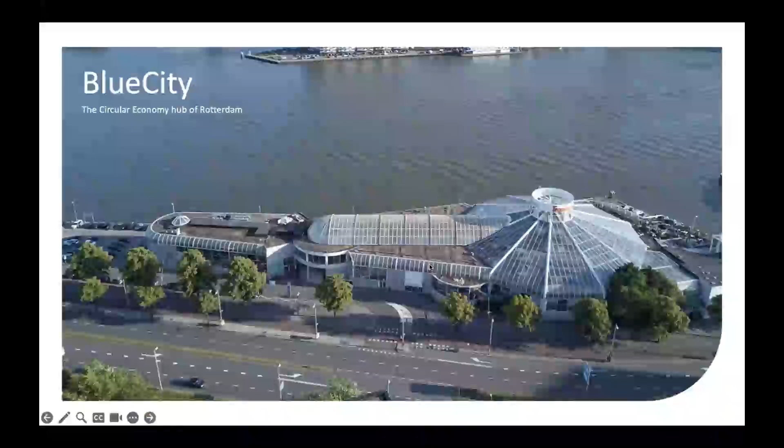Yes. So our office is currently in this building, which used to be a public swimming pool called Tropicana. It's written there, and it's right on the side of the Maas River in Rotterdam, in the center area where there's the port on the other side. It's kind of a busy area regarding the river. This building not only was repurposed, but also it is today a circular economy hub in the country, where lots of different startups and also major companies share this workspace. It keeps changing. It's not something that stays the same; it continues changing according to the different companies that come to rent space for some time.

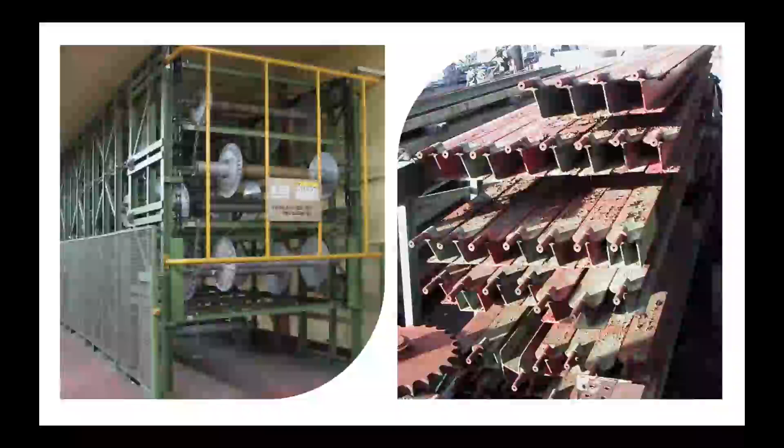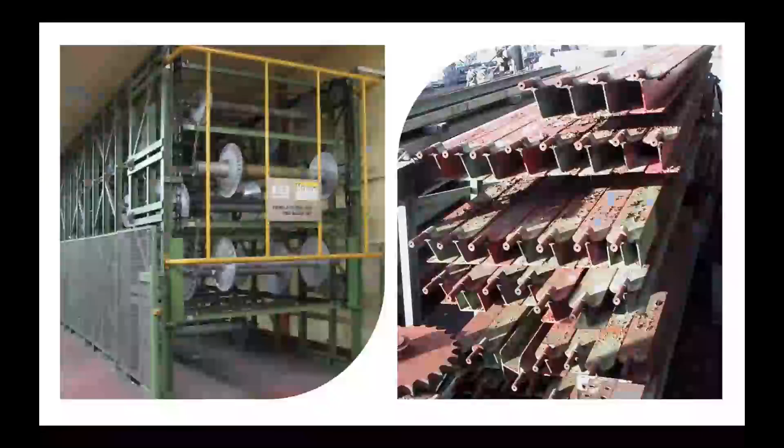These are some of the materials that were harvested - that's the term we use when we identify materials around the location of the project - from this old textile factory that was not being used. These are some of the equipment still left there with no use, and there's a lot of material there, which we used for some parts of the structure of the building.

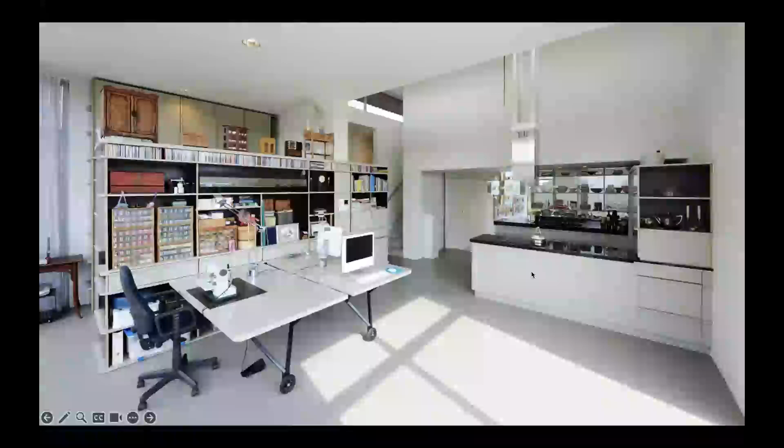Also, all the bookshelves are made from the same material. The facade is made from cable reels - here is more detailed information about the facade. These cable reels are very resistant, produced for industrial use and outdoors. They stay mainly outdoors, and this wood is given for free.

You just call them, and if you can go pick them up, it's absolutely for free. We analyzed the wood - it was in good condition. The engineer on the team also agreed to use the wood. It was treated, and then we started to draft the design for the facade with it.

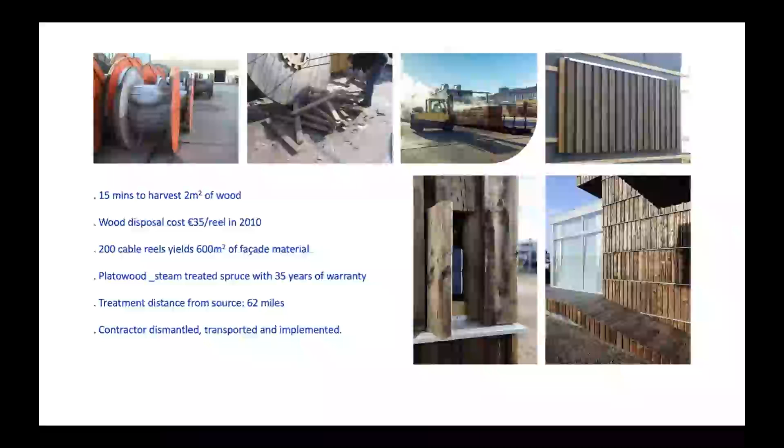As you can see, the way we design is mainly based on previous research of the materials we have in hand - the amount, the shape, the quantity, the quality of these materials. But we also have to take into account research about the costs, how to transport them, refurbish them, treat them, and how that component comes to us and can become useful in this new design.

So it's a kind of inversion of the traditional way we're taught at school - that we design the building first according to a specific program, and then go shopping around for the materials. Actually, the way Superuse works is, in my opinion, a very old way. I think we all humans kind of design like this from the very beginning - we always design with things that we find around.

I think this analysis is really critical. If you follow the steps of what that material needs to be reused, it will then be qualified or disqualified regarding costs, but also environmental impact. If the treatment or transportation weight is too much in this calculation, it might not be the best option for the project.

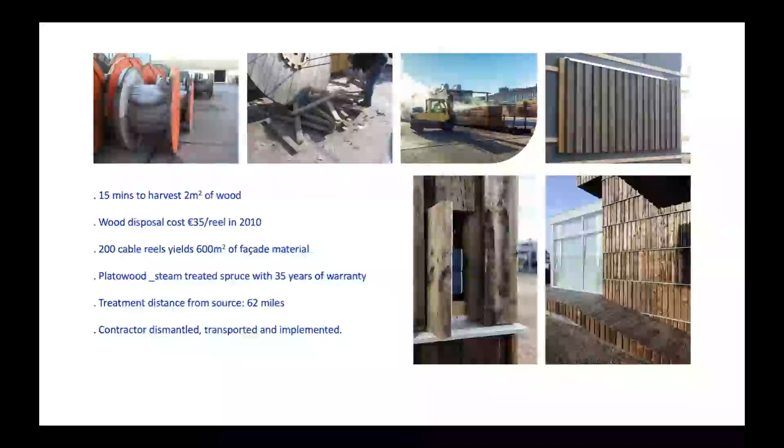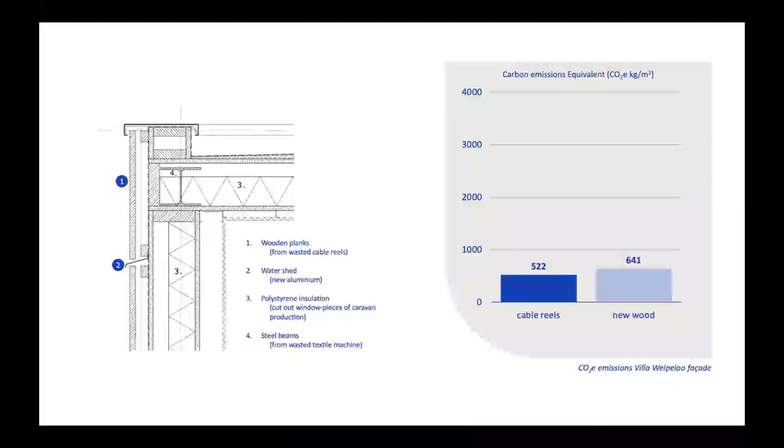So this is, for instance, the detail of the facade. We compared the emissions between using the cable reels, wood, and new wood, and this is a detail of the facade compared with the traditional one.

Even though the conventional approach is proposed here as a benchmark, we designed and built one specific solution, and we calculated it. However, we keep learning from the projects, and we realized we could have even done further approaches to increase the gains in emissions.

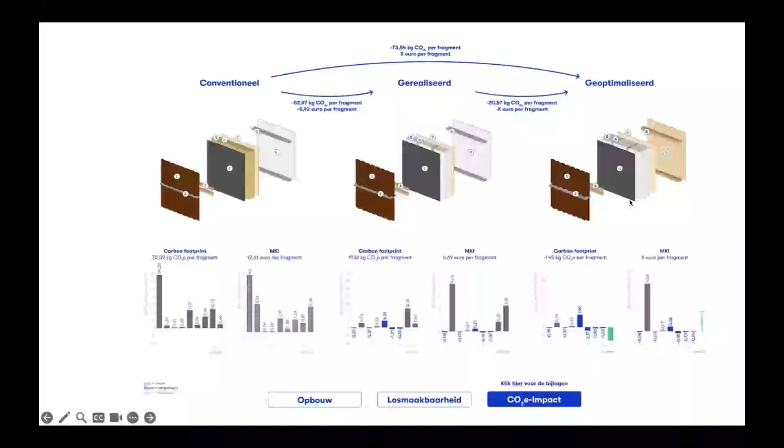It's something we keep learning, understanding further, and applying in future projects. In this case, we could have solved the detail of this facade in different ways to have an even bigger impact. This more recent project is actually about to be completed.

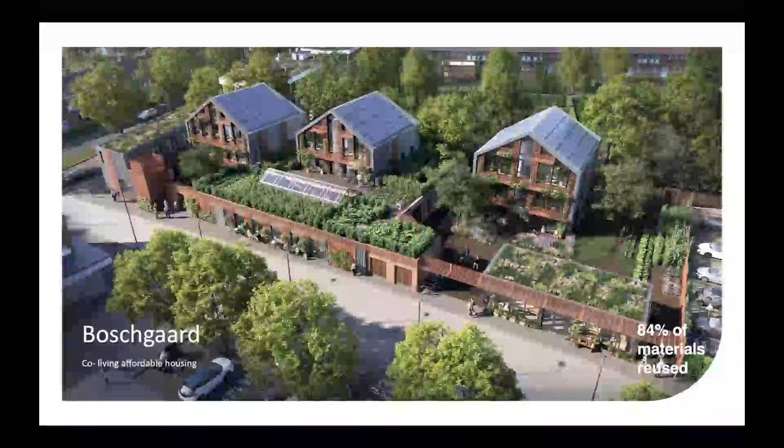It's a shared housing project, also in the Netherlands. I think here we can have a better view. This building is existing - the original building was a community center, a very old one, but the structure, whatever was still in good shape, we kept in the project. Then we developed the housing on top of the existing structure.

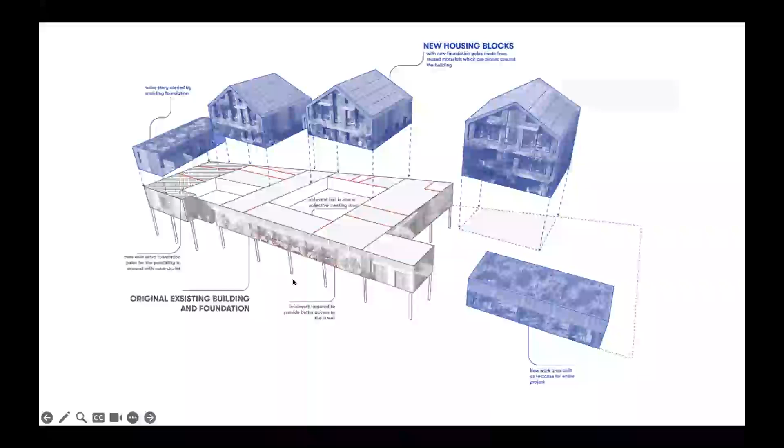Some of these units are shared and some are private, but they are all apartments. If I'm not mistaken, it's 11 different apartments there, maybe 16, and they share common areas.

The process of this project was very interesting because the people who asked us to design it, to collaborate, wanted to be part of the project - even to choose the materials, sometimes to transport the materials themselves. They were really hands-on. It was very much a community approach there.

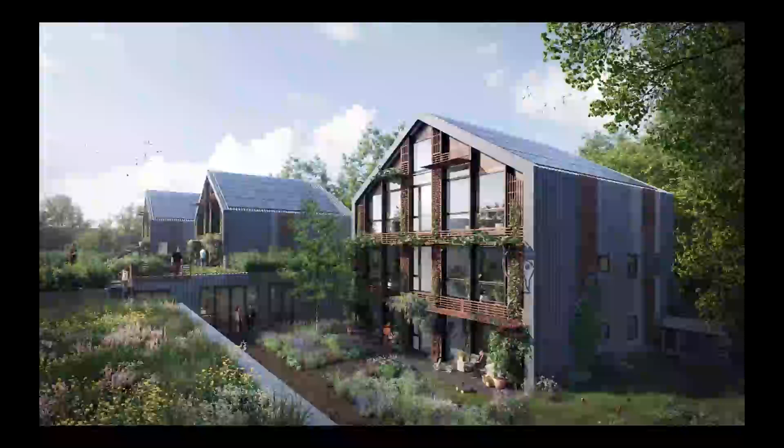For instance, the idea of having areas we could cultivate as edible gardens was also part of the program. Water saving, energy savings - all of this has been part of the program and included.

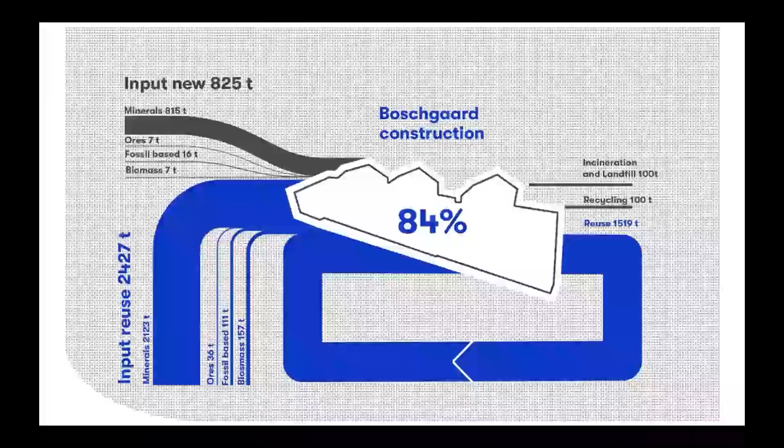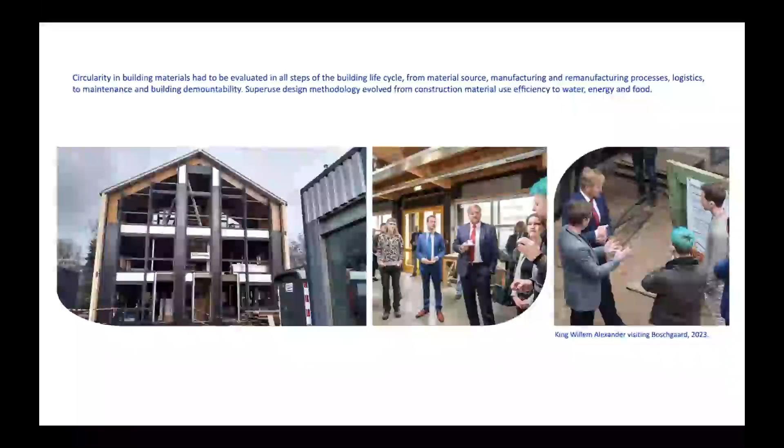This is another project we did in collaboration with a local architect in The Hague. This is a public building - what we call in the US a waste substation, where you bring waste yourself that you cannot put on the curb. We won the bid for this project because it was the proposal with the biggest amount of reused materials.

In this case, we reused 60% of the materials, reused or secondary. The design was done by a different architecture company, and we supported them on material consultancy and material research. So the wood and the metal facade are all reused materials.

We harvest around where we can find the materials that we could apply there. In this case, insulation, the steel parts, and wood were the top ones in the research.

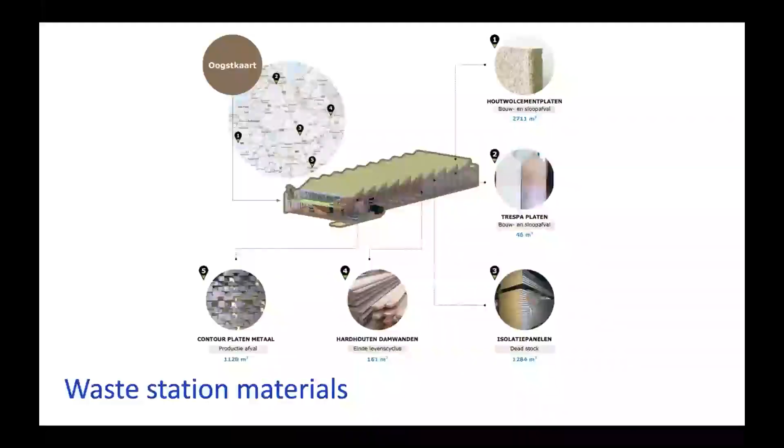And at this point of waste production, at this point of the manufacturing chain, it's pretty critical regarding emissions.

A lot of waste is produced in this manufacturing step, and somehow the industrial mechanism was not being able to absorb these parts very well into the production, or maybe the only way they do now is to melt. So these skeletons, for instance, are available broadly everywhere in the US, in the Netherlands, everywhere, and they're left there for scrap processing.

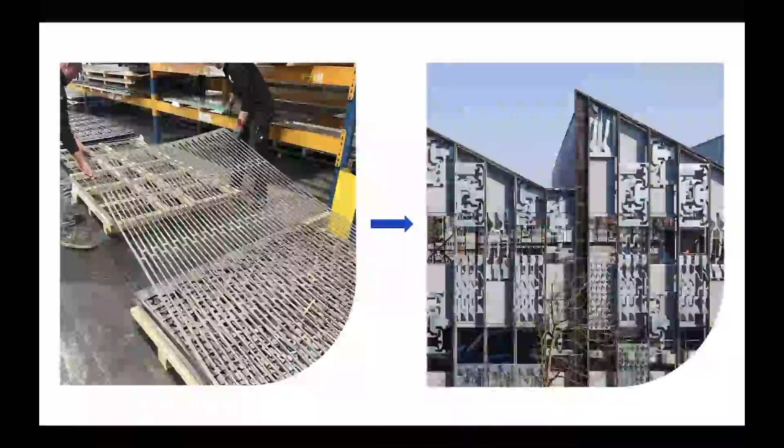So this is a substation, a typical substation - I mean, not typical because not all of them look so good, but as this one. You come with the waste that you cannot put at the curb, and you put it in these specific areas that are denominated the material types. As you can see, there's almost nobody working there - there's probably one person only at the gate, making sure nobody's making a mess. And outside is in the middle of the city, this facility.

So the design of this type of project is also important, that it can be user-friendly, but also that people start to change their vision about waste - that it's the worst possible thing, or that it has to be far away so we don't see it and completely forget about it. So I think integrating facilities like this is also part of educating and helping us get used to understanding what we are producing as waste, what we do with it, and that it doesn't magically disappear.

So this is another view. As you can see, it's all in the middle of the urban area.

Yeah, so this project is a very recent project too. The pictures I have here are really recent, to the point that the plants didn't have time to grow yet. So this project is commissioned by the municipality of Rotterdam.

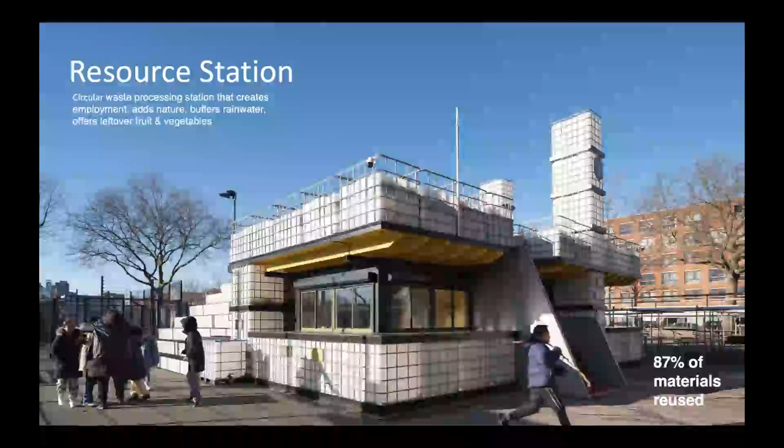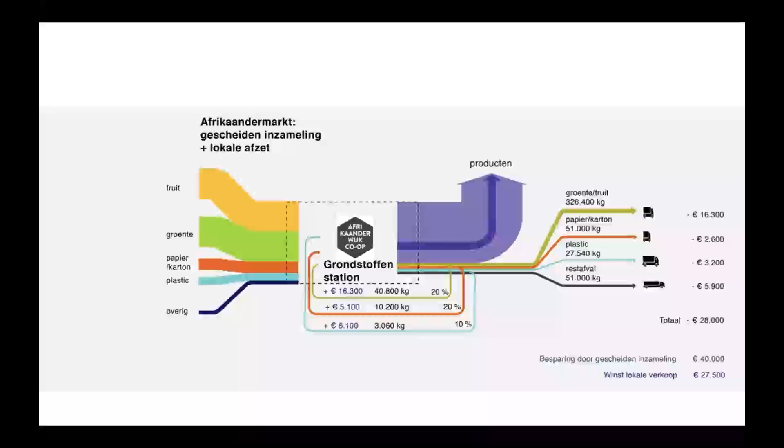So this is the research, the data that we produced after we analyzed what comes out every time the market is set there - what materials are produced, where they go after the market takes place, and how much money it takes to get rid of these materials as well.

So we started to understand that, okay, can we make something about it? Based on existing local businesses and what is possible to do with these materials, we started to connect these dots, and this station was created so that this local small business could use the material that was remaining after the market takes place.

So just an example here - we see that this mushroom production, for instance, consumes a lot of, for instance, coffee beans. And there has been a wave of startups in the Netherlands producing fresh mushroom production for the end consumer.

That they are cultivated into bio-based leftover materials, and the same thing goes for brewery waste or vegan bitterballen - I don't know if you guys know, but this is a croquette, a food in the Netherlands, very popular. So we understood that mapping this local business, it could appropriate this bio waste, it would be an interesting use for this material, and therefore they would be collected in one point.

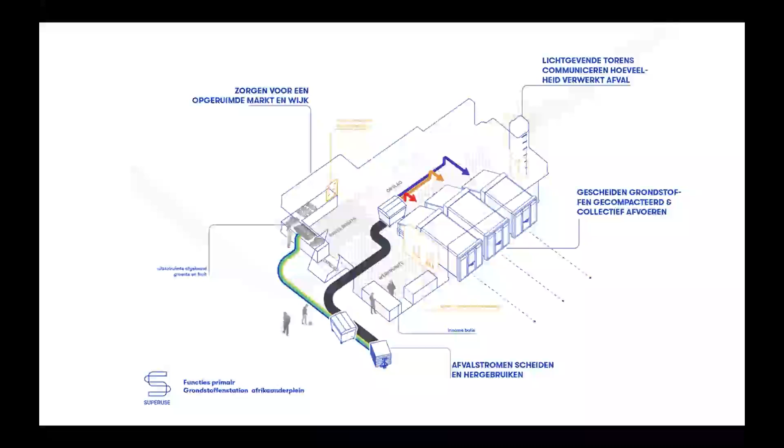That was then the building we created, which is more a pavilion. So this is a diagram on how this pavilion would work, how the material comes in, and this, you see the boxes that are left over, everything is collected and sorted.

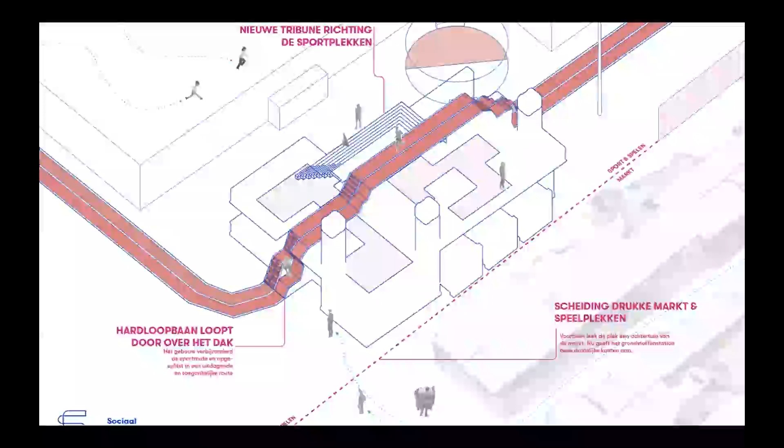And since there is also here the elementary school, we included a track. So the kids use this space. It's kind of, as I said, where the market takes place, but it's also a public square/space for the school that the kids could use to run in, going up and down as an obstacle. So that's how this station was designed, a multi-purpose pavilion.

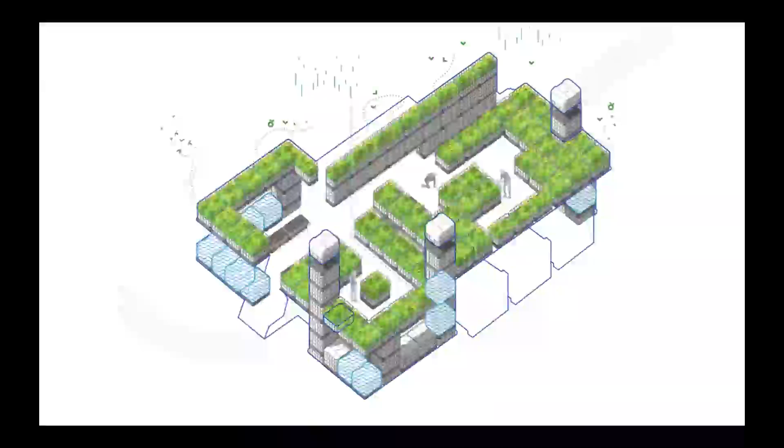And the roof, there would be a green roof created also with the same containers, and the water would be treated by some of this green garden, and used again to water this green garden. So this is the very beginning, and it was the winter last year, so the plants have been just put in these containers, and that was the beginning of the resource station.

So here then we show again for every project which materials came from where. So the idea again of understanding that local materials is important regarding embodied carbon. And we calculate for every project how much of these materials are included in the project, how many of them we can reuse, and how far they traveled to be there.

And of course, when we calculate also the impact of reusing these materials, you really cannot forget that cleaning and remanufacture is also part of the calculation. If you want to make something very complicated out of that component, it might not be the best approach. So this has to be, the remanufacturing part of it has to be taken into account.

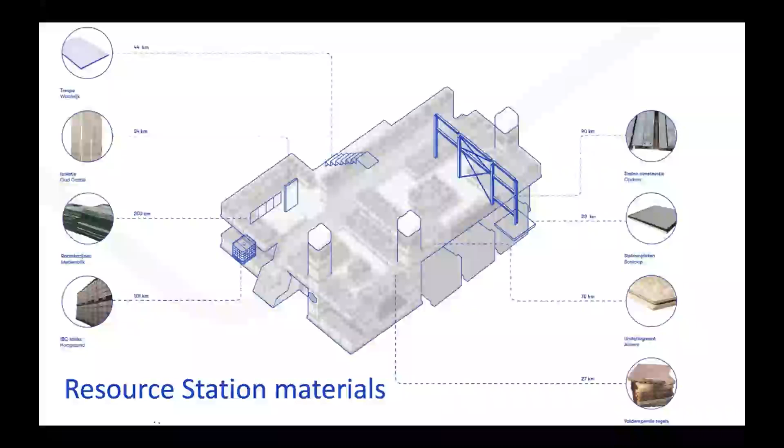So this is part of the structure, the containers, all reused. The partitions, office partitions that were also used here.

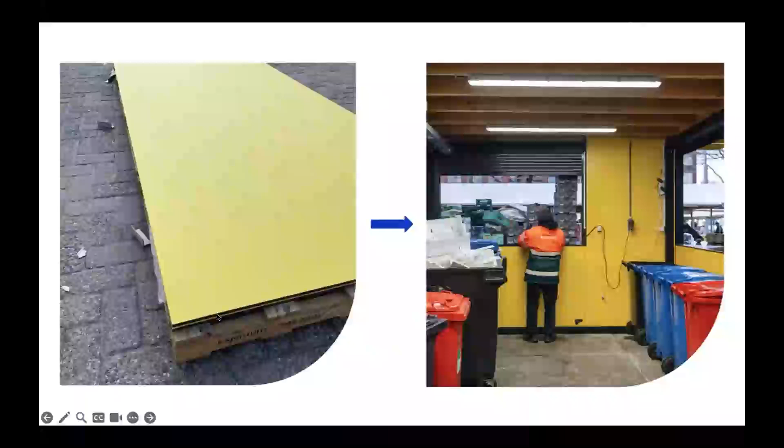So this is a different project, but I put it right after this one to illustrate how we can understand a commission for a building or a pavilion in this case, but we can think in all aspects of impact. So for this very simple project, it was a very small commission. It was a kind of an art piece.

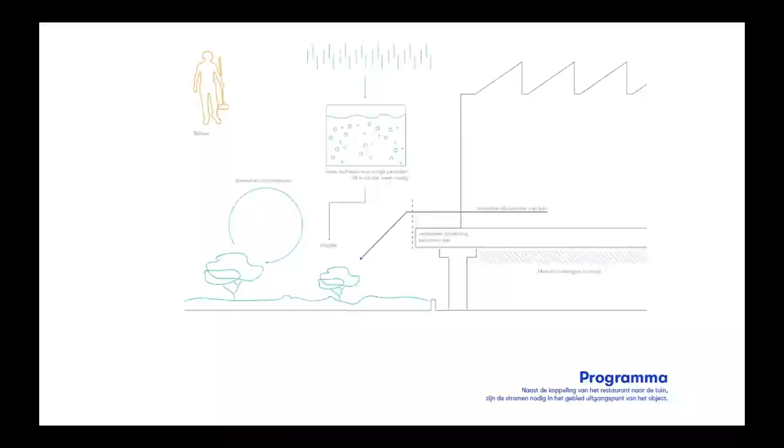And of course, we'd never lose an opportunity to push a little bit the boundaries and try to understand what was the role of this terrace to start with, besides just connecting buildings. How you connect this terrace with the garden downstairs, and how we could do this in the most strategic way. So in this sense, we created then a concept that Superuse had developed a while ago

called cyclifiers. These are pieces of design, either a building or part of a building, that can cyclify in a way, meaning transform all the resources involved in that design into continuous resources. So in this case, the terrace, the part we were involved in designing, was also a type of terrace that would collect water and filter this water to create a kind of reservoir.

Not only to be used again in the garden that will be created on that ground floor, but also to bring light down as lamps for the parking lot underneath, creating more light, because today it's actually a dark parking lot.

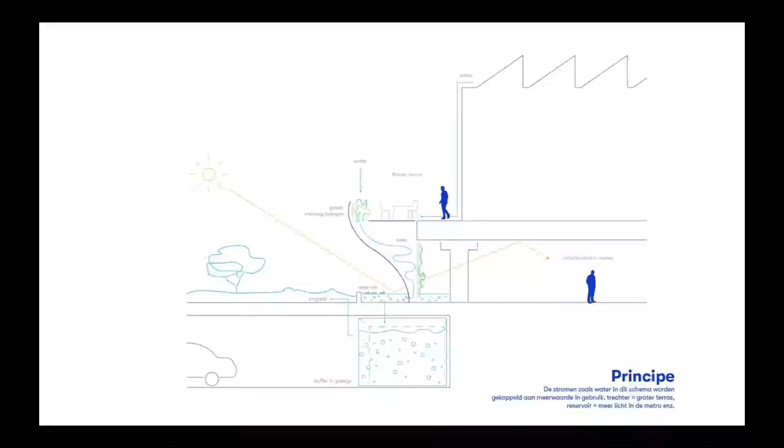So everything that the project can improve regarding this user interface, it's kind of a sweet spot. The more you can do, I think, to improve the interface with the user in a positive way and the environment around - that's an opportunity that, as designers, it's worth exploring. So this is the sketch. It's changing design. I don't know right now where it is, but it's going on.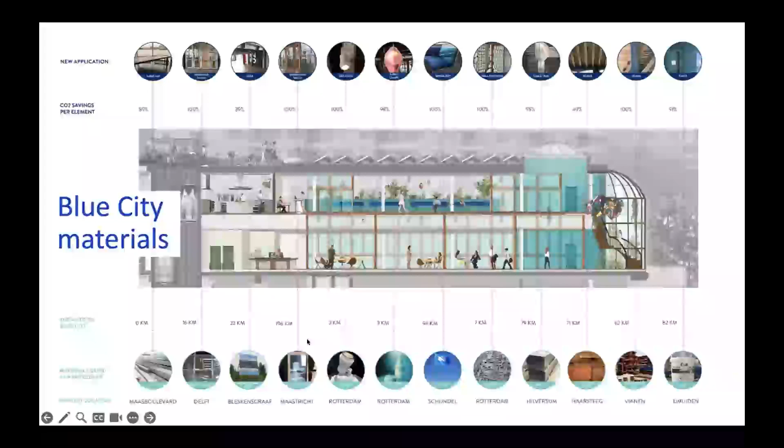One of the components we found, to exemplify here, was that this monastery was going to be demolished, and there were a lot of window frames with no end use in this case. So we used these window frames as partitions. But that's what designing with used components means - they don't come in the standardized size you want. So we adapted how we use these components in this specific area, creating angles so all of them would fit in, creating buildings and offices inside, circulation outside, meeting space, etc.

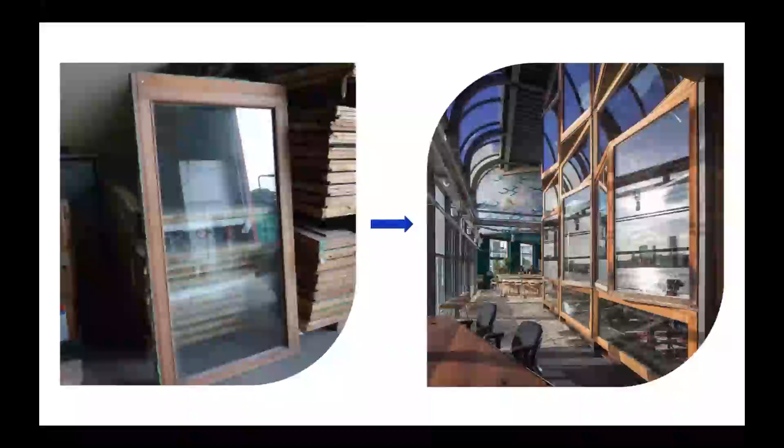This is another project, a restaurant space beside a historical building. In this case, 86% of the materials are reused, and again each component has its own story. Here you're going to see the facade, the furniture, the structure - all reused components.

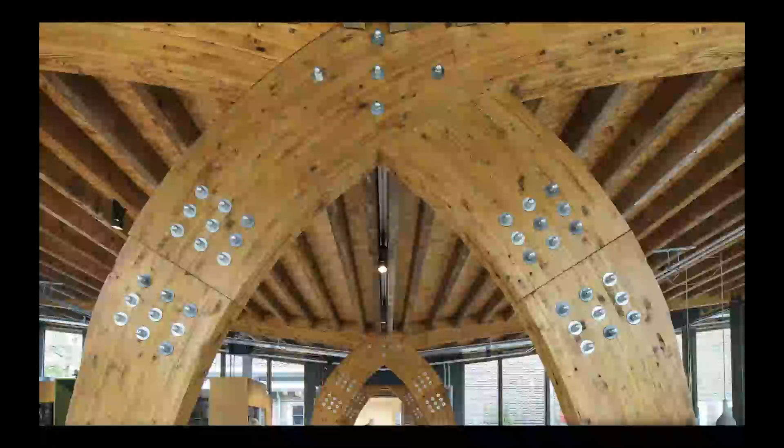This is the historical building, located in the middle of this public square, and we connected the restaurant to this building. This is the main structure, the roof structure - it's an existing structure from a farm. The same thing with the bar area.

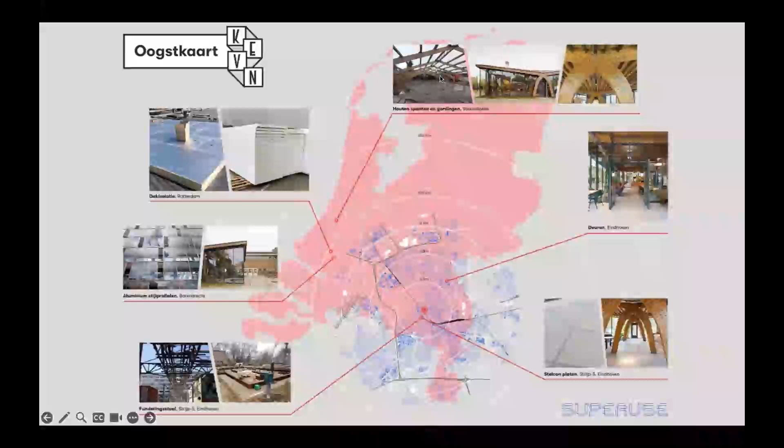So this is our harvest map for this restaurant. This comes from a farm, the main structure, this kind of hangar structure. And how we design, again, you have to adapt because not everything comes in the size or amount you're necessarily looking for. So this is the way we connect these beams in a crossed way to create these two wings.

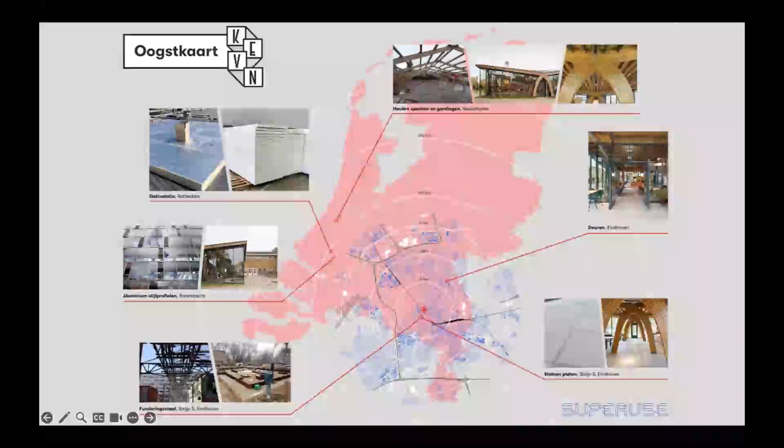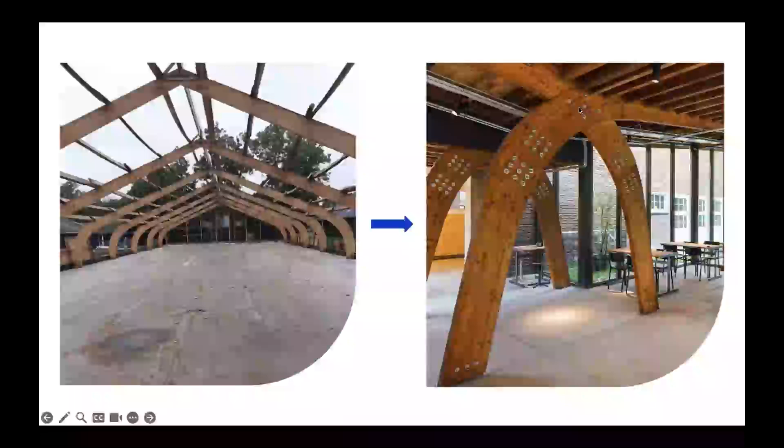The doors are reused, the floors are reused, and part of this steel structure as well, from here and around, for the window frames, and the windows are used, and the insulation is also used. This is a detail of the farm building and how we created this structure for the roof.

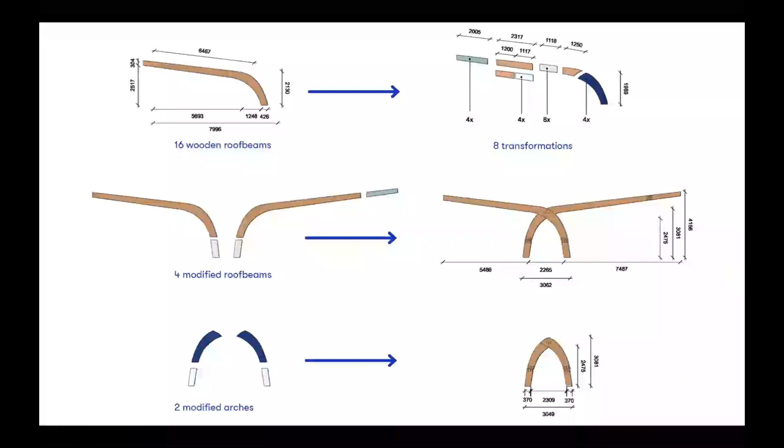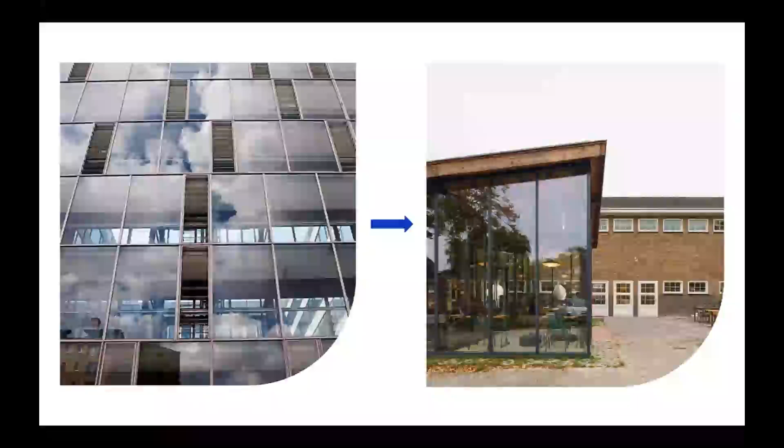This is an example of how a designer, any designer, could think about how to use the most out of that component, how you can create shapes out of it that aren't necessarily in the way you found it. So I think all these steps rely very much on design and the practice of designing. This is the steel for the foundation here and the window facade. The examples I've shown until now are examples of building - it's really the practice of an architect. But again, the methodology, as you saw, is different.

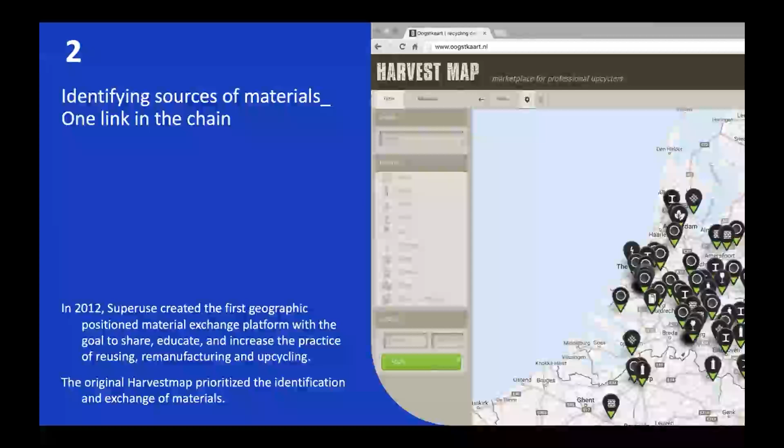Looking at this perspective, we've been doing the same approach in every project. First we have to understand and investigate the resources, the local availability of this resource, or whatever resource we can find that makes sense, in the sense I explained before. Up to this point, we decided to create this type of knowledge and make it available to everybody else that wanted to adopt this system.

We created, by 2012, the Harvest Map, a free-to-use platform around the Netherlands. It's kind of like Craigslist - anybody that wants to put materials that are not needed or wanted anymore available for the public could list them on this website. Since it was built with the designer in mind, we wanted to make sure the information available on this platform was clear enough for the designer - the size, the amount, the most detailed specs were there. And it was a friendly user platform.

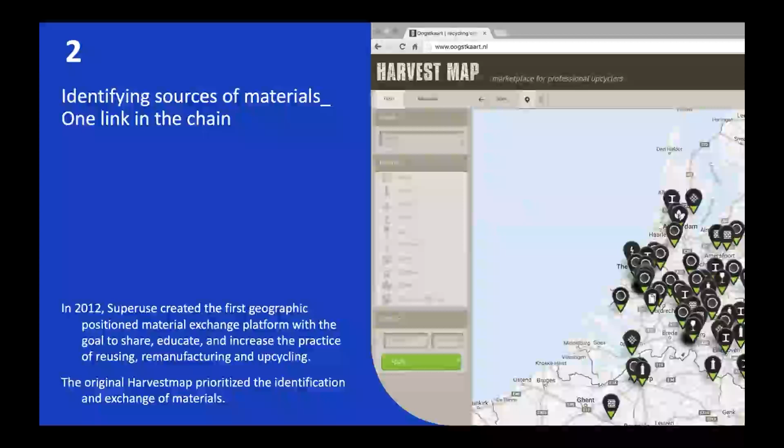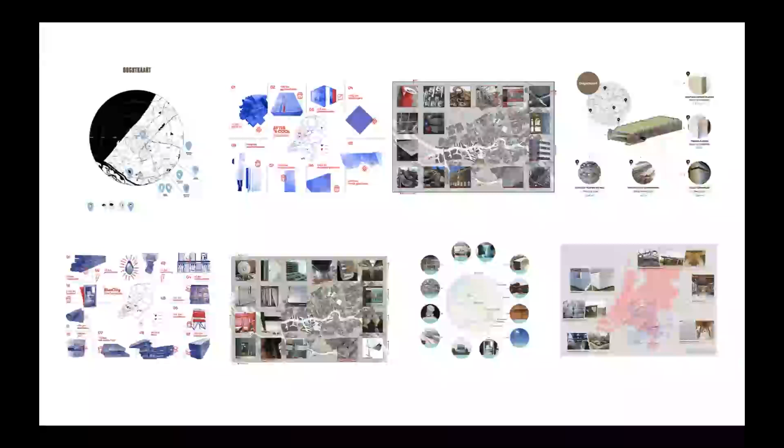So this started in 2012, based on the methodology we created for every project. For each project, we develop its own harvest map - what we found, what it is, how much, and whether it makes sense to be used for some application in the building. The platform changed a lot - this is the old format. And that was also in parallel to libraries.

We created these libraries so we could understand the material better, or there would be study cases about it. For instance, if you click 'tire,' there'll be all kinds of information about the tire - what you should and shouldn't do with that component, maybe for toxic aspects or durability aspects. All the information available out there, we packed into this library, and also the same for study cases - not only superuse buildings, but buildings and designs from products all over the world were also there.

Again, there were different versions of it, but also different content. These platforms were always done with the goal that other architects and designers would be involved and use this resource, this information, to bring reuse as part of their daily practice.

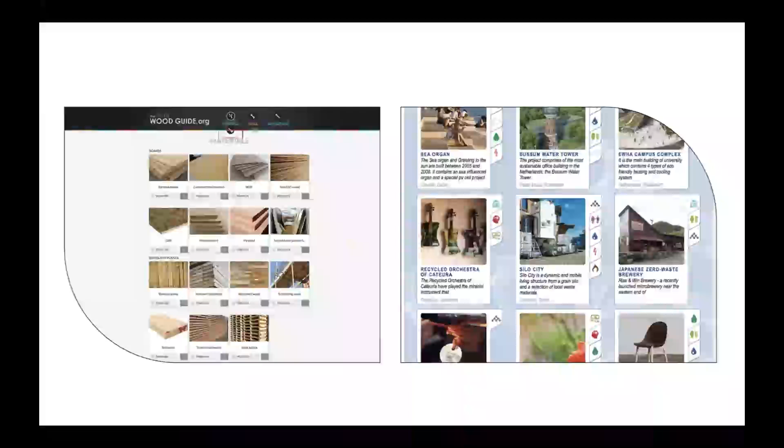This is another digital platform we created, called the Wood Guide. It's kind of best practice that's out there regarding components you can use, how you can extend the life of each of these wood materials or wood-based materials. I think there is very little information given at schools on actually understanding the materiality of the components we work with, so I think guides like that are very important.

So fast forward, we watched an incredible wave of this type of digital platform popping up all over the world. I think in Europe there's a new one every month. This is one in the Netherlands called Cirdax, and it's beautiful - extremely complete, with codes included, price comparisons to new ones, emissions, etc. It's a very complete platform, and we also see different business models being developed with that.

Superuse, by the way, doesn't run the Harvest Map anymore, the digital platform. It was sold many years ago to a demolition company in the Netherlands, so we don't do this part of the work anymore. But we are super happy to see all the startups carry on the work we started so long ago, adapting with the technologies we have today.

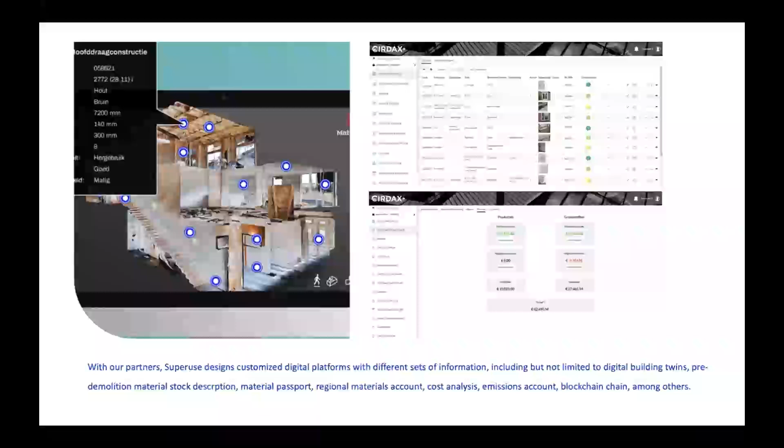So chapter 1 was examples of the buildings we do and how we do it. Chapter 2 is about the methodology and how you want to simplify or make it easy and accessible to other designers and architects. Chapter 3 is focused on what happened after we created that platform.

We understood this a long time ago - something some people still don't understand well - they still create these digital platforms with the aspiration that if you just make these materials available, they will be consumed. We learned that's not the story. It's not straightforward that once you know where materials are, what they are, how much they cost, etc., demand will appear for them.

So we realized there was one step missing in this chain, in this new approach to design. We created a new role within Superuse, one we still work with - it's the material scouter.

These are people within Superuse who help architecture companies, construction companies, developers, etc. that don't want to deal with the material part. That's the example of the waste substation I showed you guys - that's pretty much what we did there. We helped the architect company solve their design, or support their design aspirations, with our material research.

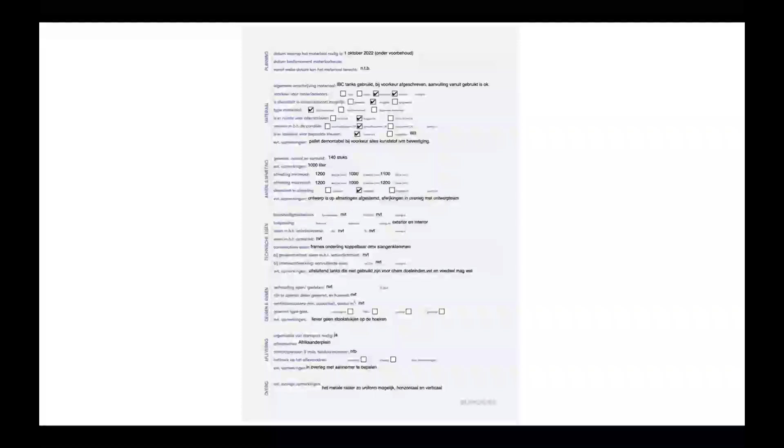We have material scouters all over the Netherlands working with us to collect, understand, identify, etc. It's also step by step - the demand side describes what service they want, just to find or even make the commercial transaction, including transportation or not. All these steps are included if required from the material scouter. These are forms indicating what has been found, how much, etc. This is all documented - it's a documented process.

So in this chapter, once you understand how this works, you start to... the beginning is very much trial and error, but you understand that the linear economy is formed by A to Z and all the pieces in between. There'll be a company occupied with ore, another melting it into plates, another into cables, etc. So all this network is formed and consolidated.

In the circular network, not all pieces are there. There'll be people who say, take the wood, it's for free, I can even sell it, it doesn't matter. Someone says, I can transport this wood. Others say, I cannot denail this wood, or yes, I can denail it. So there are pieces missing in the process to get that component back into use. This is the word everybody uses, but it makes sense: the industrial ecosystem is not there yet.

So what we try to do, when we think about transforming that component again into a new component, is not only think about the environmental impact, but also the economic, and also optimizing existing infrastructure. We don't necessarily need to invent a new machine to do a service like taking this coating off. We try to think about infrastructure that's already there, because the whole idea is to get things done by optimizing what we already have, or improving it.

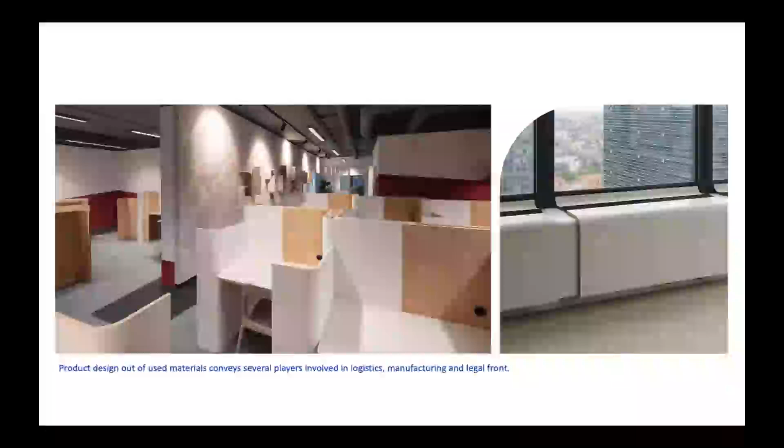So all these things are important in the process. Research is a constant. And of course, the more we test and understand how things work, the bigger our portfolio of materials we're working with becomes.

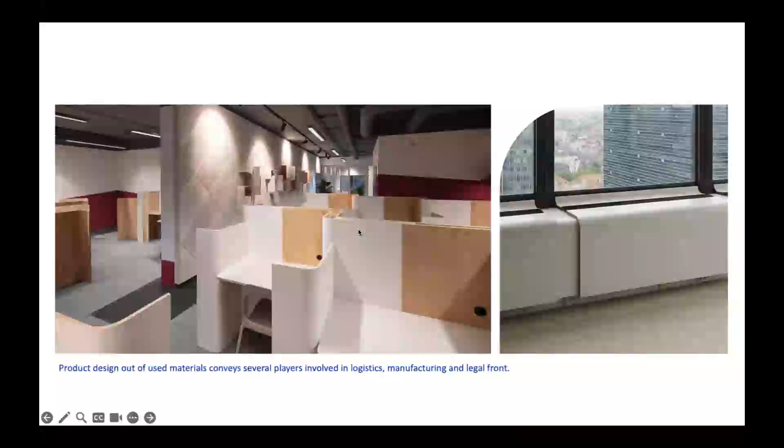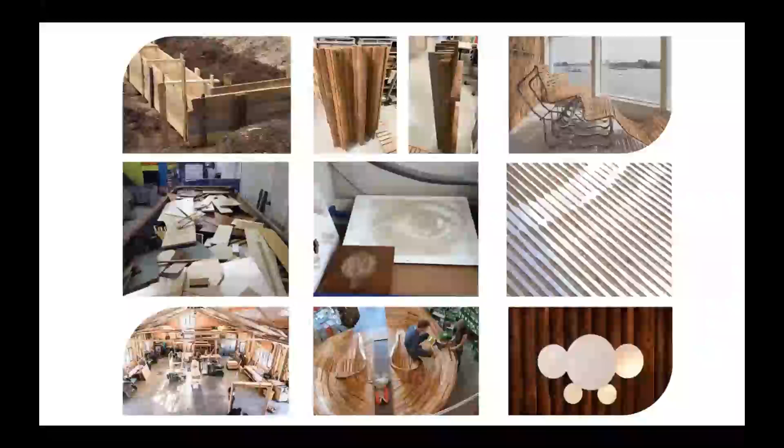This is an example of an office tower that had to go through a renovation. Many of the things inside were going to be discarded. In this case, these panels here for the air conditioning system were transformed into furniture. There were a lot of them in the entire building, so in order to avoid landfilling these materials, we repurposed them into furniture. The same thing goes for every material.

So this, for instance, is a very low value material. It's not wood, it's wood-based. So what kind of approach could you adopt to elevate the value of that component? This is more or less how design can really transform something that's not being used anymore into something with value.

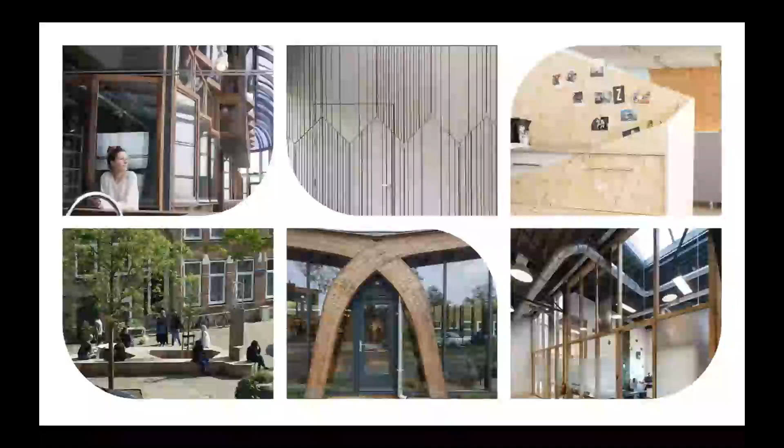Wood, of course, is the lowest hanging fruit for us. It's easy to reshape, and you don't necessarily need high-tech equipment to work with it. So all these are repurposed wood into different applications. The same thing here.

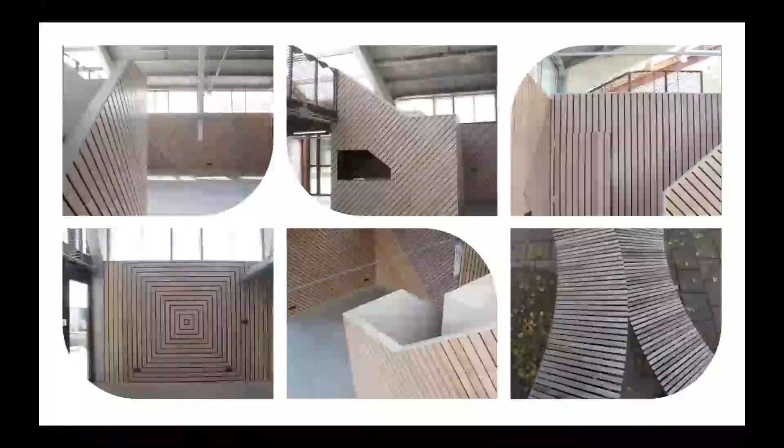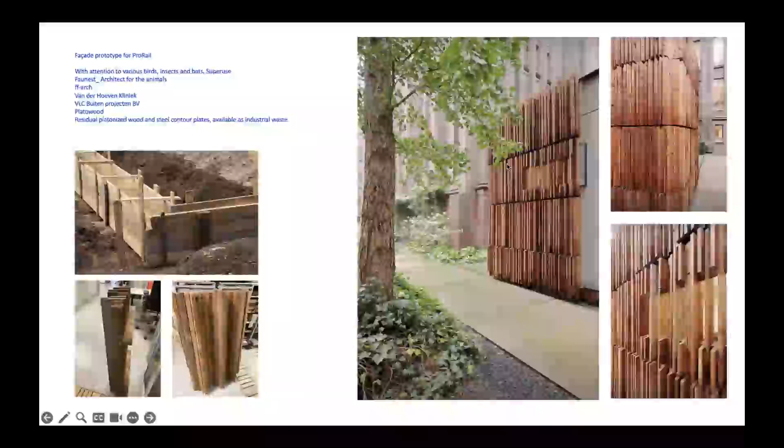This is a facade made from concrete-form wood, a study we are working on. We did this in collaboration with a Faunest who helped us understand the best way for bats and birds to be part of the design of the building facades. The client was ProRail, the train company in the Netherlands.

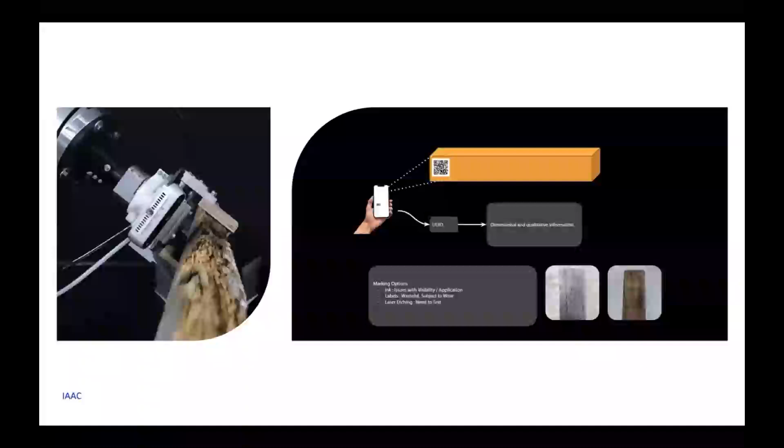So again, technology is coming, I think, to meet us at the point where we're going to be looking for more efficiency and more scalability.

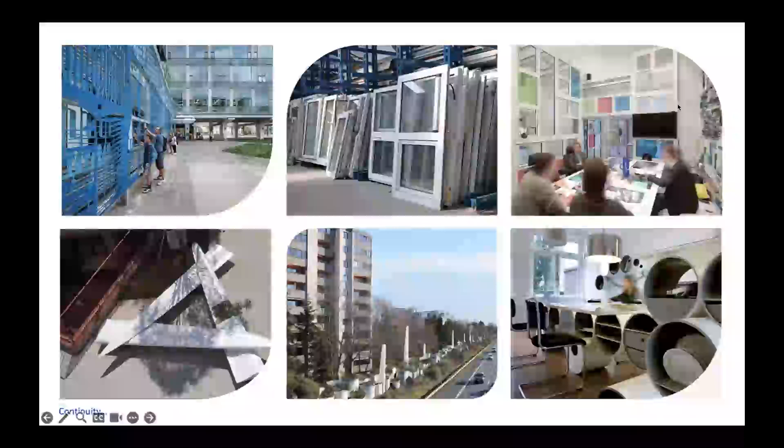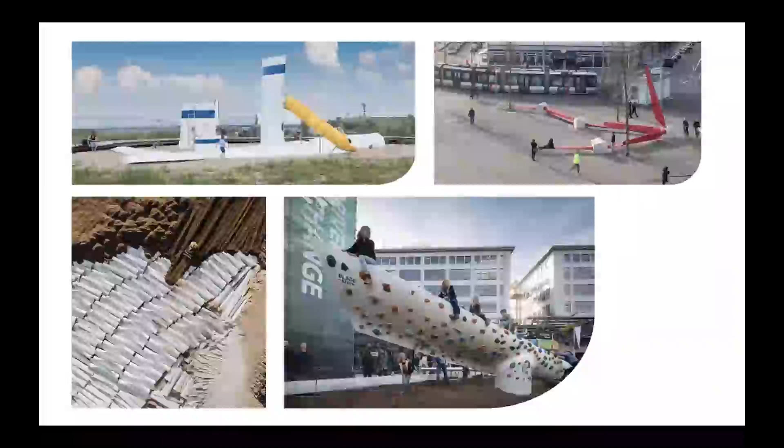I'll skip all that, but again, these are all wind blades, etc. This wind blade project was actually the very first one, and now we created a spin-off company called Blade Made, only to make objects out of decommissioned blades. They have only a 25 year lifespan. This one was done last week.

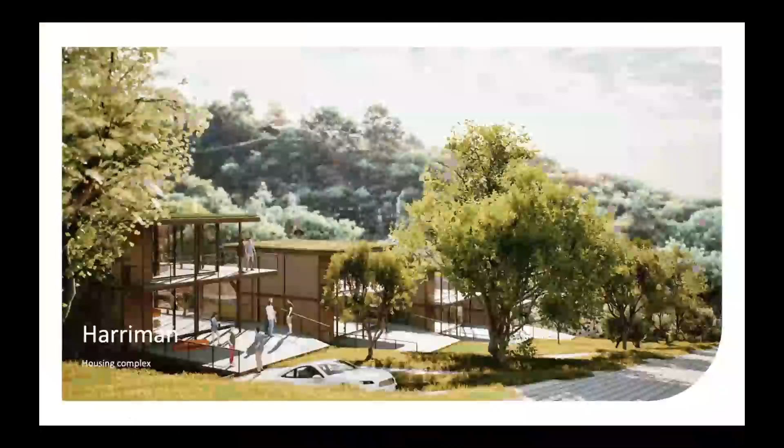I think this is the last slide. I think part of us in this transitional moment of climate change, whatever, political, social, economic, everything, it's about understanding that our role has also to adapt, and how to adapt in the best possible way that we can understand ourselves as part of this ecosystem. And still having fun designing these things. I think design is still key in this process.